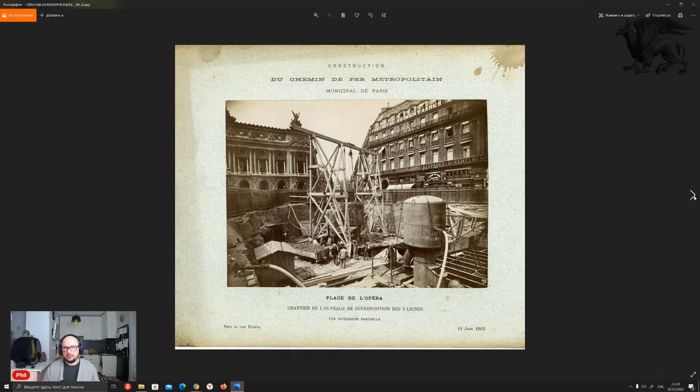I hope you can see what I'm showing. There's plenty of footage, different pictures. You can scroll through them, you can find them in the sources - plenty of them, very interesting, including this one that I've put on the thumbnail.

Also some footage shows people living, people doing their things while all this construction proceeded. So nobody says there were no witnesses - there was a bunch of witnesses, a bunch of examinations, a bunch of footage, unlike what we had in Moscow. So much footage. You can go through all the sources, and you can see some strange things, but we're going to talk about that a little bit later.

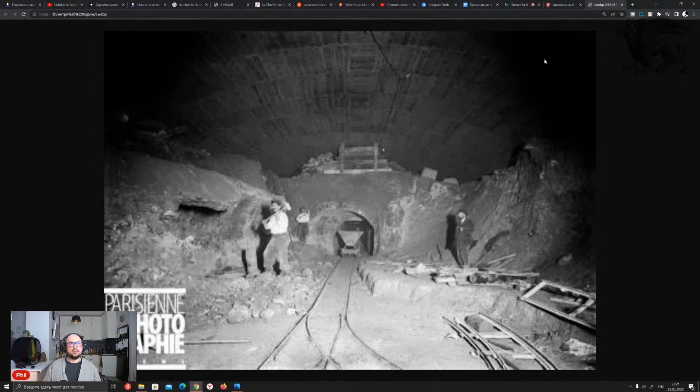First thing is what I found, probably in 2015, 2016, maybe even earlier, when the topic of Moscow subway construction was hyping in the Russian alternative community. Many people started writing posts on Paris, including this one - let's see this post.

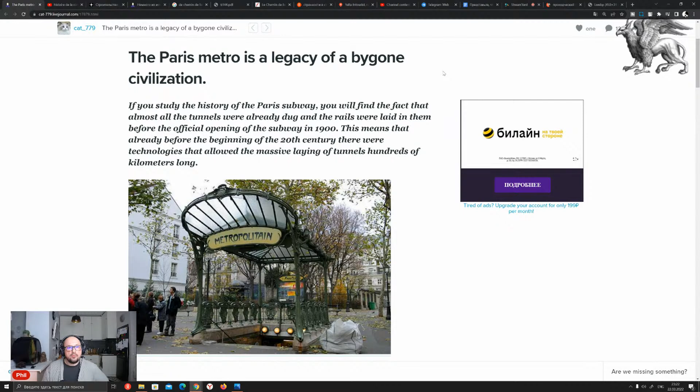The Paris metro is a legacy of a bygone civilization. If you study the history of the Paris subway, you will find the fact that almost all the tunnels were already dug, and the rails were laid in them before the official opening of the subway in 1900. This means that already before the beginning of the 20th century, there were technologies that allowed the massive laying of tunnels hundreds of kilometers long.

And this fellow, Cat 779, also has this breakdown from the history of the Paris Metro. It was opened in July 1900 for the World Exhibition. A ticket on the first line, Chateau de Vincennes to Porte Maillot, cost 15 centimes for the second class and 25 centimes for the first. Most of the lines in the center of Paris were built by 1920.

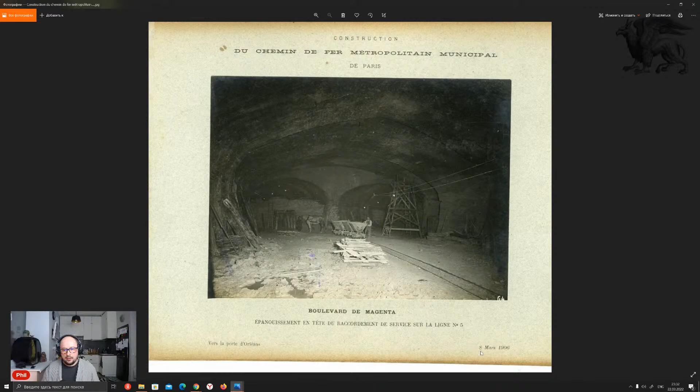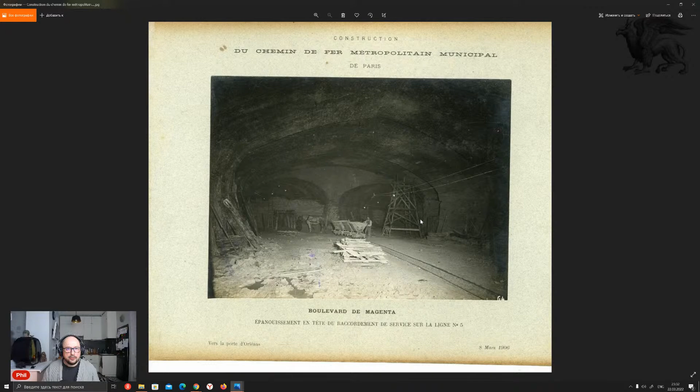Yeah, we can see what he's saying from these photographs. Perhaps we can enlarge some even more. That's Boulevard de Magenta, March 1906, from the book Construction du chemin de fer métropolitain municipal de Paris.

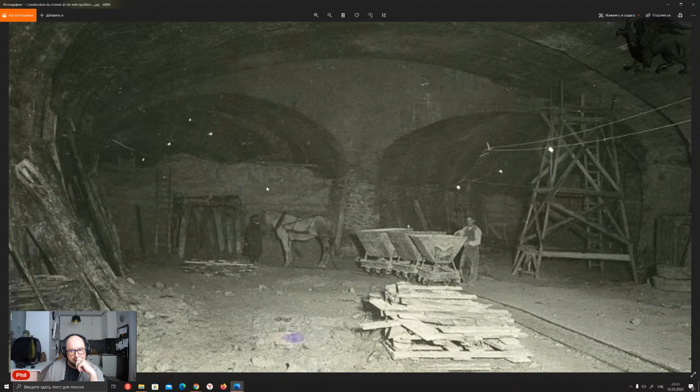What I can see on this higher resolution is that the vaults, or the walls on the ceiling, were kind of concreted, and you can see the level of the further excavation, little tunnels here, and a ladder here. So probably yes, these carts were used to transfer and move this soil, this earth, mud and clay probably, to the outside, moving it up to the surface, cleaning the tunnels and so on. So I'm kind of agreeing with what he's saying here.

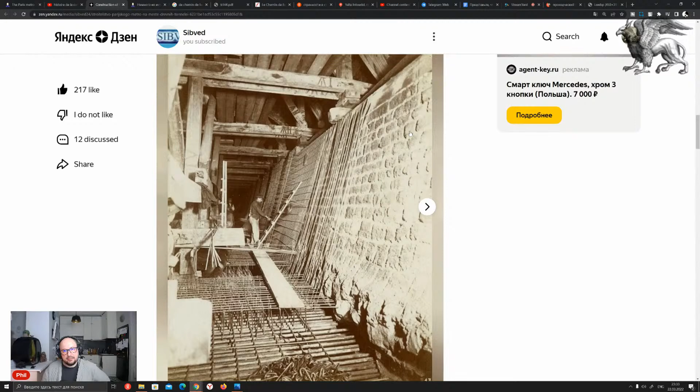Let's go further. Also, here you can see the builders of the subway reinforced the ancient masonry. Well, I wouldn't call that masonry, but that looks like the wall or the side of the previous tunnel, of course.

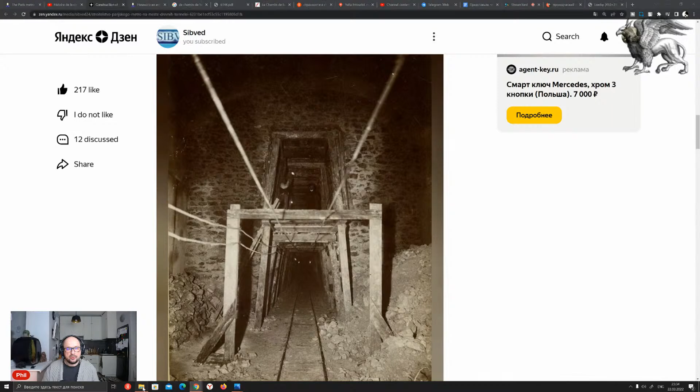It's constructed of some blocks, of course, but here we see some facade type of rock masonry, and here we see the wall construction masonry, which is more primitive. We can go to these pictures and take a look at them with more resolution. Let's see here.

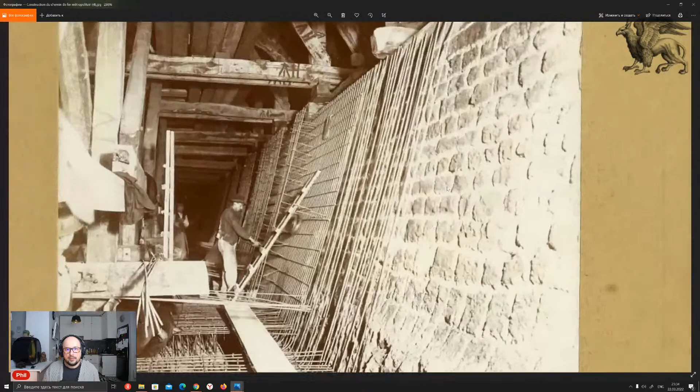Yeah, they were concreting. As you can see, reinforcement and concretion, rebars here, probably prior to concreting this place, flooding it with concrete and reinforcing it. Because definitely these slurry type of walls or facade covering of the ancient tunnels simply wouldn't have been decent enough or relevant enough for the future subway lines. So we kind of agree with what he's saying.

Let's go further. Although this side is kind of primitive and could be not a sewer type of tunnel, but maybe something even older than sewers. Maybe that was a tunnel used by somebody, because that's the center of Paris. Maybe it was used for escaping the city. Who knows? We don't have photographs of this place prior to the start of construction. So these are far from the only examples.

We look further, and we have two more pictures here. Let's see here and find these pictures if we can find them. Yep, that's the picture. I don't know if you can see it, but it has these concrete marks, I'd say, or some bars, little planks or bars visible on the top of the ceiling.

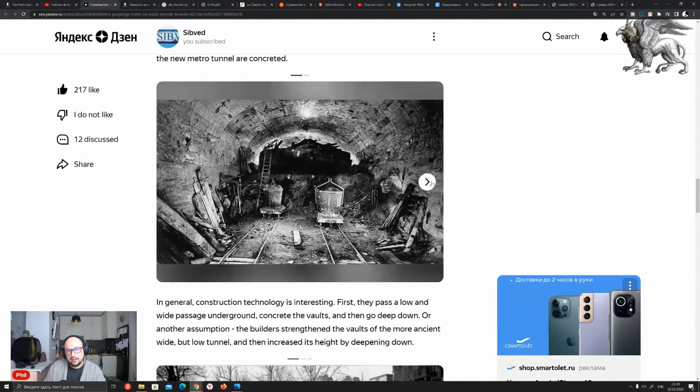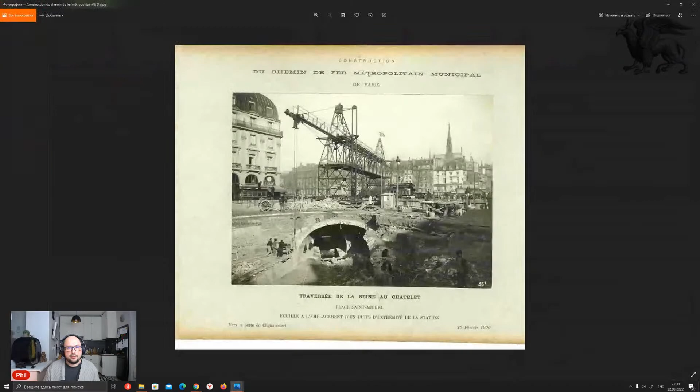As you can see, it looks like it has some base, some ground, at least to guess it this way, because too many photos show that, as you can see here or anywhere else, that these tunnels existed. So obviously we cannot deny that the tunnels were prior, and some of them look like sewer tunnels, some of them look like evacuation tunnels, who knows, because we don't have enough photo footage prior to the start of construction. But definitely we can speculate this way, right?

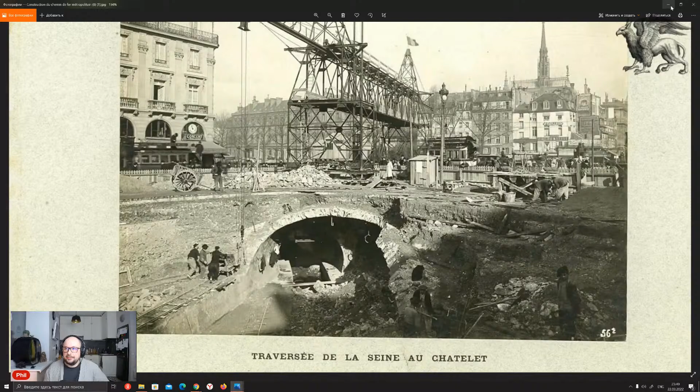Let's see if everything's okay, because sometimes I screw up and nobody's hearing what I'm saying. Oh yeah, probably everything's okay, but nobody is saying that I suck and my mic doesn't work. Anyway, let's go back.

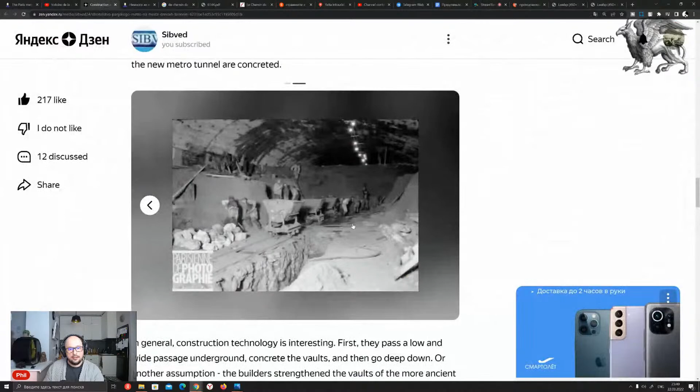He says that construction technology is interesting. Definitely interesting. In every square in Paris, from where they began to go deep underground, destroyed sewers and ancient tunnels are visible. As I've been saying, communications of ancient times are present on all the footage.

Different shapes, different types, sewer type, evacuation type, and other types of tunnels are visible. According to the information about what was prior to Paris, some maps show that Paris was founded on the ruins of the ancient Roman city of Lutetia. Nobody even denies that, but sometimes they forget about that antique city and just say that everything is pretty modern. But I kind of doubt that, because the network of tunnels is very, very dense, to say the least.

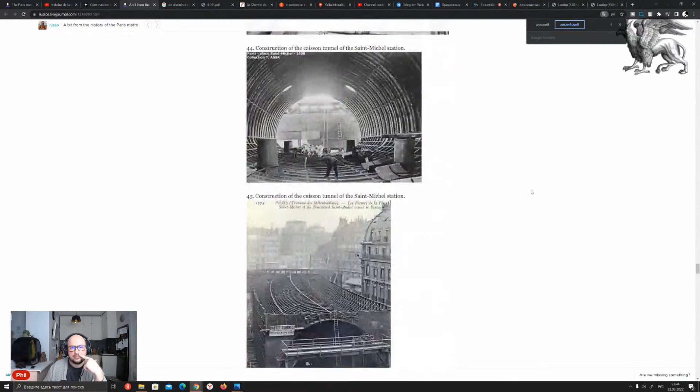So this is his explanation. We can also find a lot of material in Russian, and I believe in French too, where people go step by step through this construction.

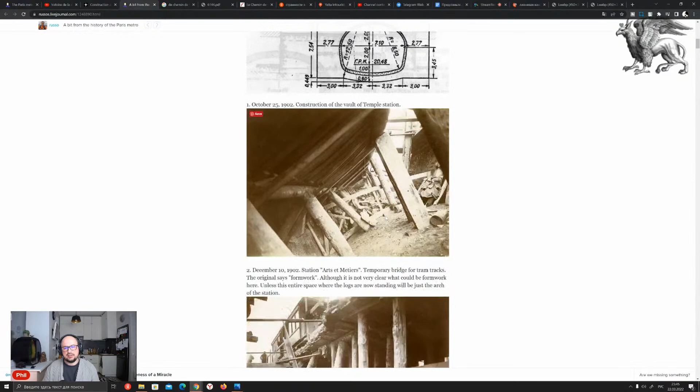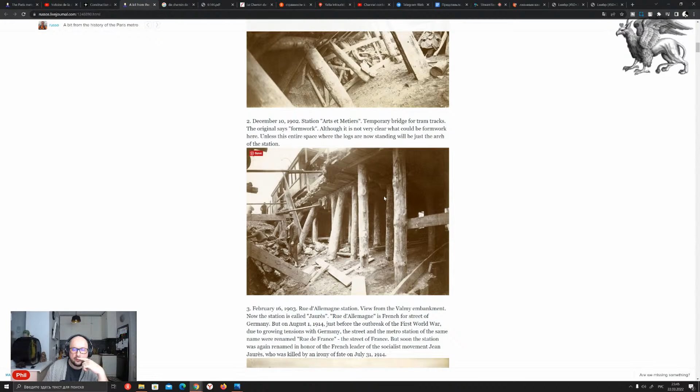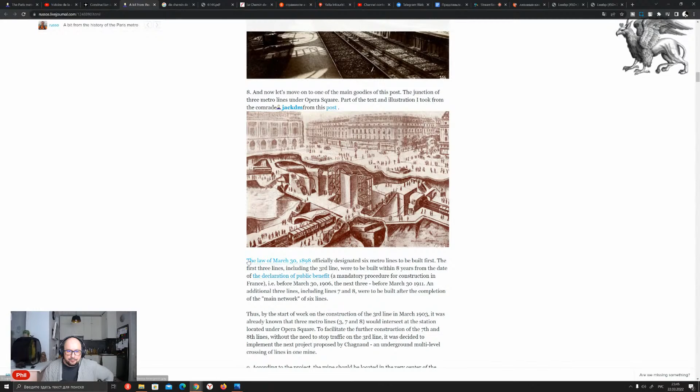And explain pretty much every photo, every piece of footage — how did they manage to connect these tunnels and passages? What was the height? What was the depth of each? When they were doing open works, like opening the streets and constructing the roof of the tunnels, reinforcing them, when they were creating so-called intersections. This guy was actually researching the official version, and that's why we can read some of it too.

Some lines: the law of March 30, 1898 officially designated 6 metro lines to be built first. The first 3 lines, including the third line, were to be built within 8 years from the date of the declaration of public benefit, which is a mandatory procedure for construction in France. So before March 30, 1906. The next 3 were constructed before March 30, 1911. An additional 3 lines, including lines 7 and 8, were built after the completion of the main network of 6 lines.

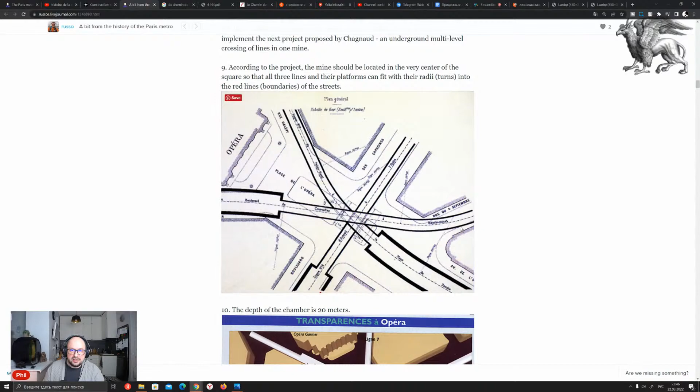So they're supposed to be designed, as the guy says, because — just imagine, you dig one tunnel. Let's return to here. So they created this line in 2 years, let's say. Let's follow the official version. First line: 1, 2, 3, 4, 5, 6, 7, 8, 9, 10, 11, 12, 13 — 13 stations in 2 years, without any geology.

Tunnel boring with a shield, we call it shield, without any equipment of modern times, at the pace of modern times, even faster sometimes. And we're not even saying or talking anything about the construction and decoration of the stations themselves. It's supposed to be fixed, right? Because it's not just digging the tunnels.

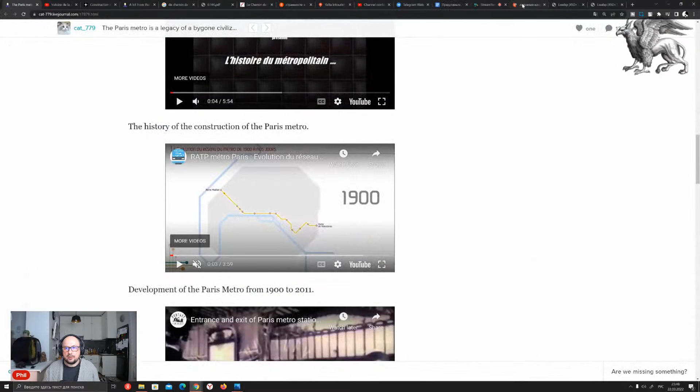It's also doing other construction things, which we called — well, anyway, forgot the word — anyway, then we go to other ones, let's see.

1903, we have one intersection already at Charles de Gaulle Etoile, Porte Dauphine. Charles de Gaulle also here as an intersection. So already 2 tunnels were intersected somehow — everything is well designed. Then we have another intersection here on Bastille Station, Republic Station, Pere Lachaise Station, and some other stations. So, falling down to this.

This is enormous underground construction without any modern equipment, only with pure knowledge of engineering skills, probably some labor force which was also skilled. We don't see much people on the footage, but I believe somebody was involved, at least, because the pace is very high — decorators, engineers, miners, well, you name it, who was employed here.

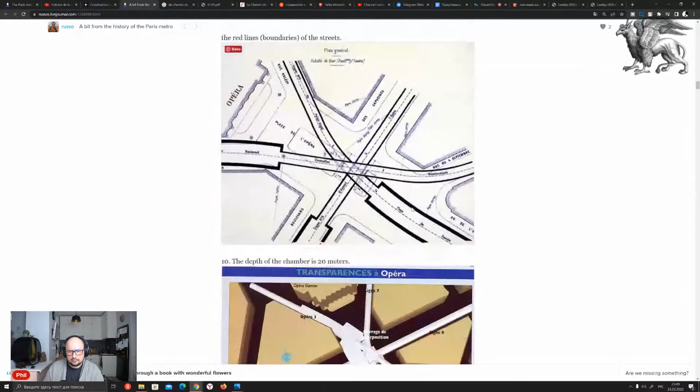So all these lines are highly precise, because just imagine if you have a little screw-up in designing and measuring this stuff, although you don't have any geological intelligence. You have to know all the sewers network, everything including how the sewers were constructed, what the decline angles on each turn are, what the width of each sewer tunnel is, and how you can fit this or that tunnel or intersection in that particular spot.

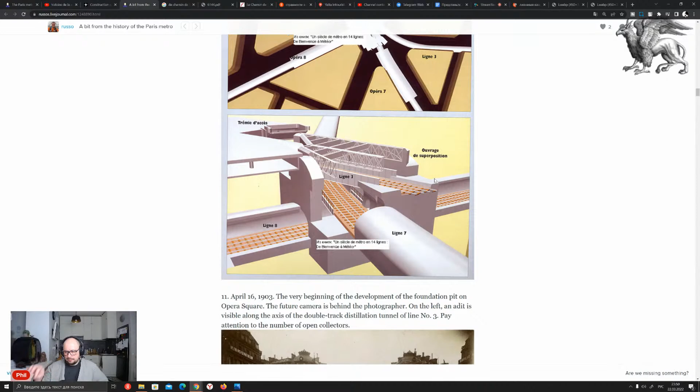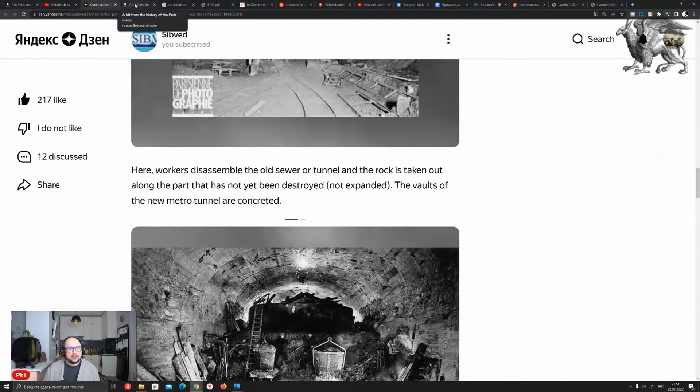I don't know why Sibved didn't mention it in his research here, but who knows, maybe you can find me some blueprints that were used prior to construction and so on. Maybe you know French better than me, and you can find some answers to this. But you cannot find it, at least in these pictures. I could not find it.

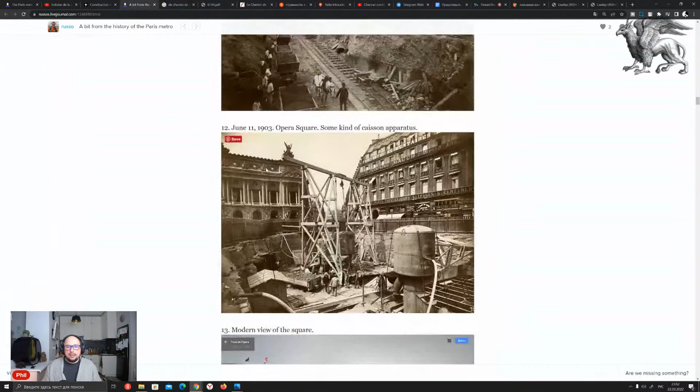If we go further, we probably find some answers to how did they cross the rivers, how did they do some other things. So at least for the line 8, the deepest line, there's a level of 16 meters underground. Such a huge work in construction, because everything's supposed to be solid, and it's been working for years, guys. I didn't hear much about reconstruction or general reconstruction of those lines, rebuilding them or something. No.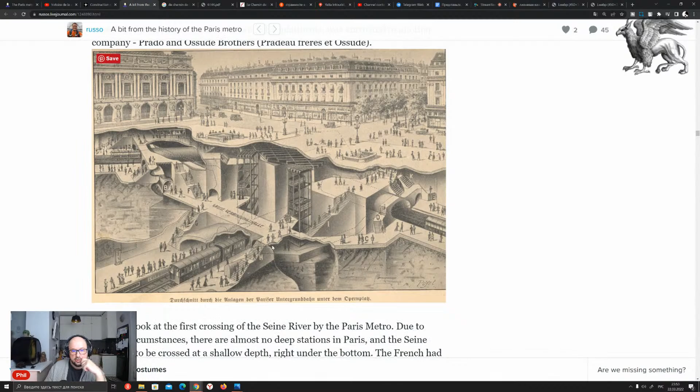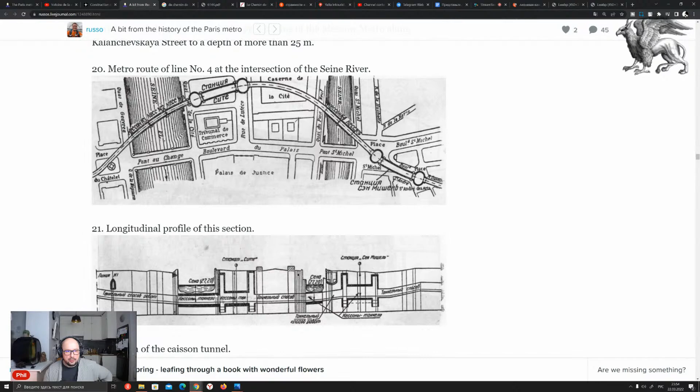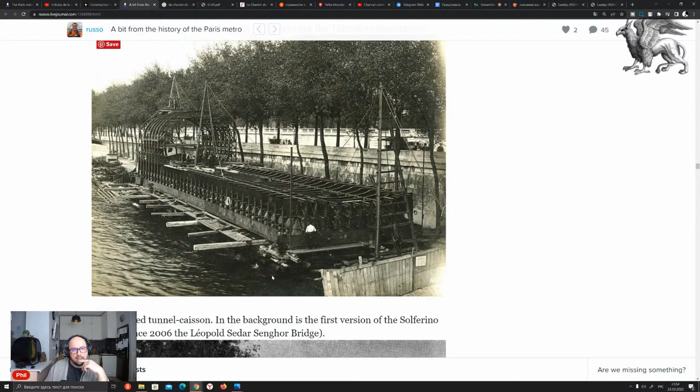Sometimes it's not even original, sometimes it's even in German, in Russian. It also has some explanation about underwater construction. When they needed to cross the rivers, they were freezing the water and so on. I confirmed it with my fellow friend from Moscow, who's right now constructing tunnels also in the subway, and he confirmed that this is possible with ancient times. And look at this, they called it saison or caisson, they were using them during this river crossing.

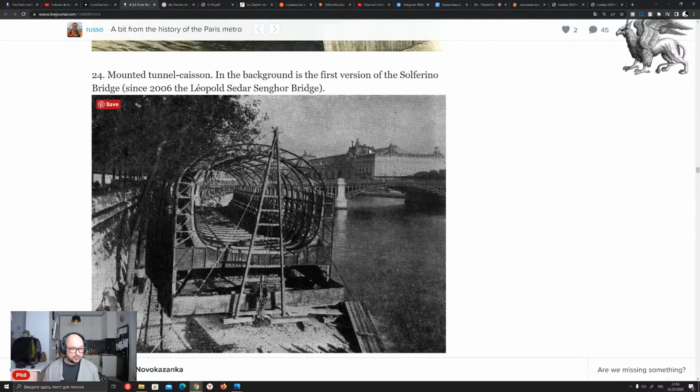Many pictures of that. So talking about steel and metal construction in Paris, the Tower of Eiffel, and many other construction anomalies that we've been seeing - how much metal would they need to do such enormous amounts of work? I doubt that we find where all this metal was produced, but somehow, some way, they managed to get all this metal from somewhere - enormous steel construction, probably the boom of this steel construction worldwide.

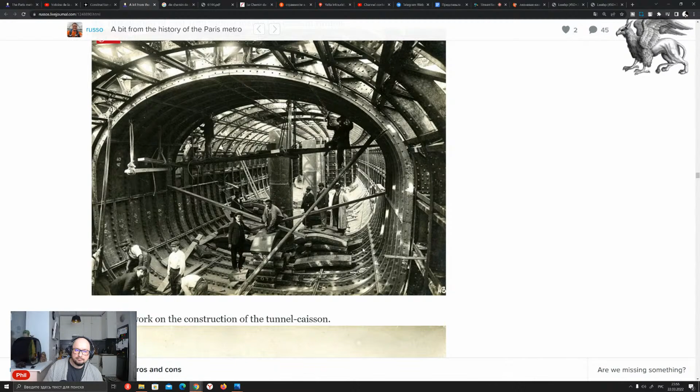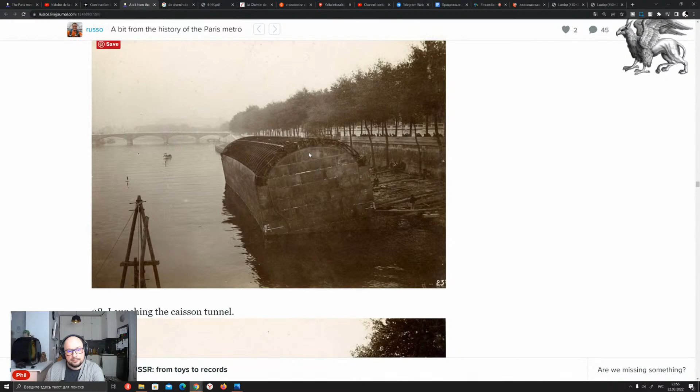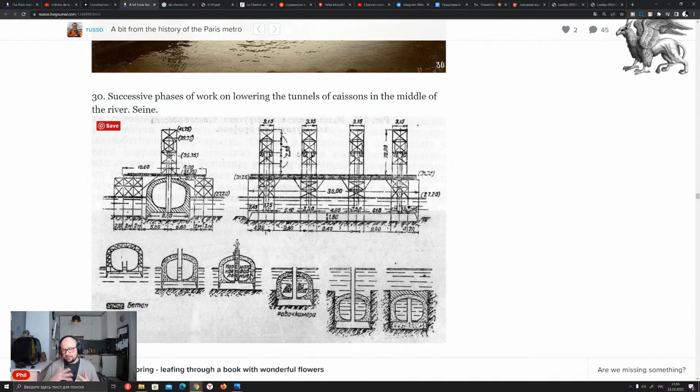Okay, so these are not the only questions that we have, not the only strange things that we can find about that. But as I've been saying, the biggest question is who was actually planning this for the future, because as we found here, prior to 1916, they already had this stuff. So who was planning it way before all this was done, was completed?

They definitely had this underground map of Paris, and everything was well known for them. Why was that? Because it had so many tunnels in the network and probably was used for many years. Probably they had these maps, but they don't want to show it to us right now, I don't know why. They want to show it as an explanation of this pace, of this fast speed, as Sibvet was saying, because they were using ancient tunnels to speed up the process - not digging the tunnels, but using the older tunnels, reinforcing them with steel and concrete, preparing it for further exploitation.

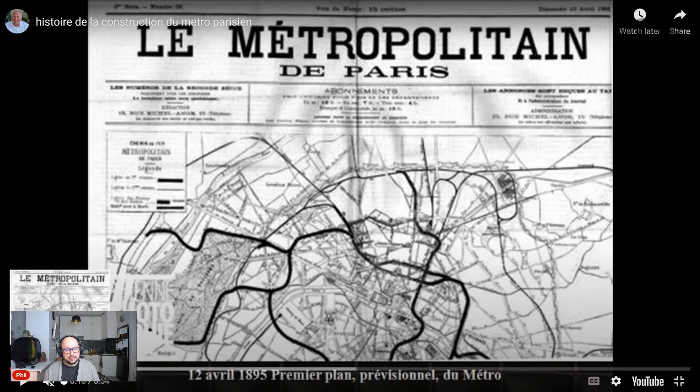Going further, 1898, Étude des projets, line number 1. Are you kidding me? So they were preparing the project for the first line for 8 years. But can we actually find the project of the first line online anywhere? I haven't found it. Write me in the comments if you can find it.

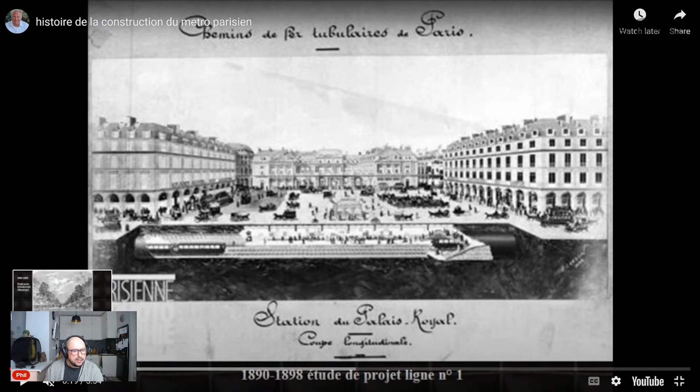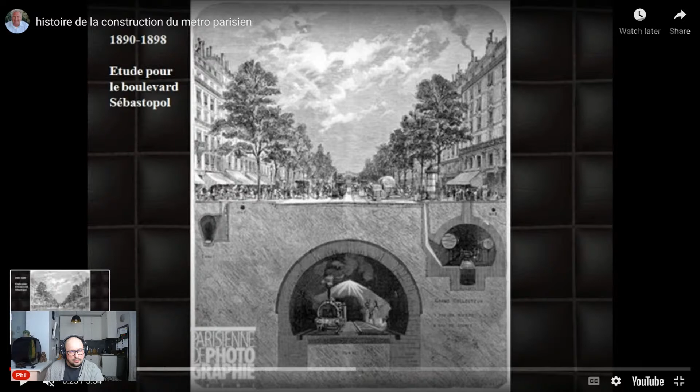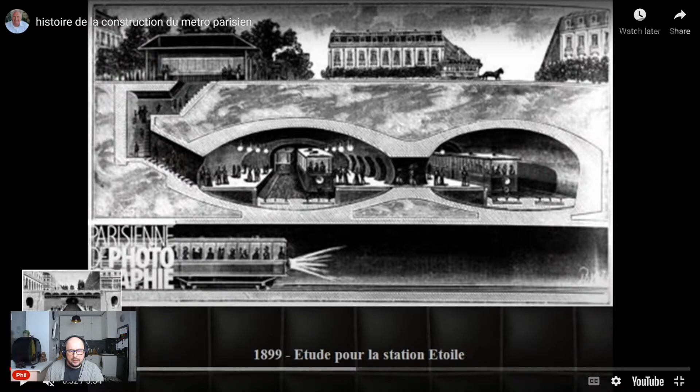Now we see this stuff here. Also, that's a sketch, not a blueprint. Going further, another sketch, not a blueprint. That's another sketch, not a blueprint.

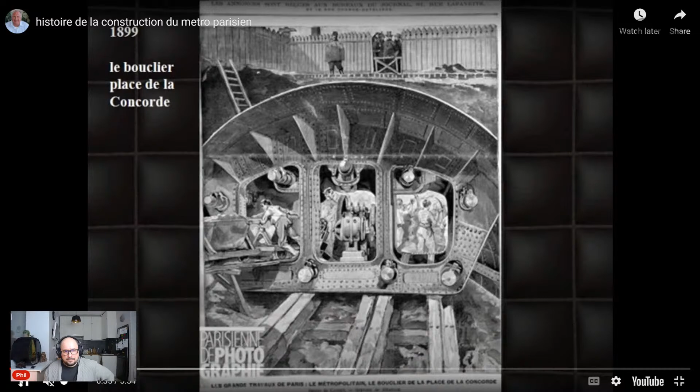That's not even a photograph, that's a sketch or a drawing of the works. As mentioned before, they were reinforcing the top, and I doubt the concrete would actually be holding on without reinforcement. And as you can see, 39 seconds into this video, still not a sign of any decent blueprint.

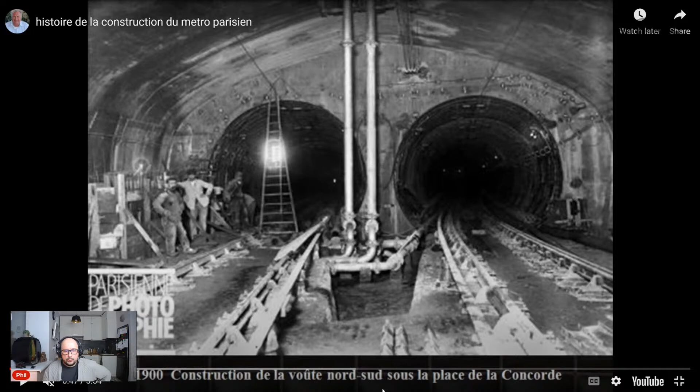Construction de la voûte nord-sud sous la place de la Concorde. Well, everything's already concreted, 2 years of construction, guys. Look at this, the job was almost done. How fast this concrete work was proceeded, we can only guess. What was the actual speed of this production?